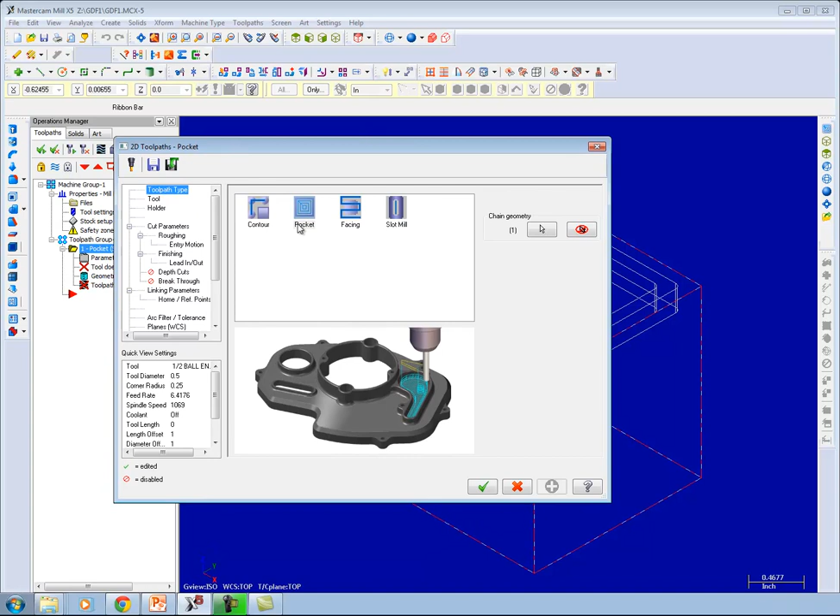So I click other face, and you can see that now the blue sort of goes around the top of the pocket, and that's what we want to have, because we want to tell our end mill to circle around there and mill down, straight down. Okay, I'll select that, and I'll select that, and this brings up the 2D toolpaths, in particular the pocket window. So we're already on pocket.

Let's talk about what we have to do now. We've kind of told the end mill where it needs to go and how we'd like for it to move roughly right around that loop, that chain. And now we need to tell Mastercam what machine parameters we have, so to speak. In particular, a tool, right? This is an end mill, so nothing's selected. We're going to select in the library,

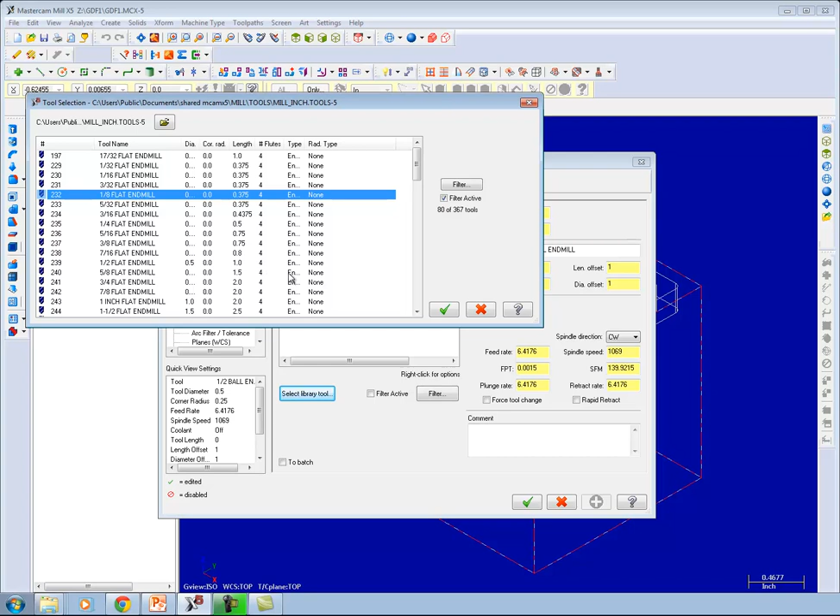and I'm going to just select tool number 232, which is a 1/8 inch flat end mill. 1/4 inch might be more appropriate for the size of that pocket, but I'm going to choose the 1/8 flat end mill. Okay, so I select it, there it is. We can ignore holder for now.

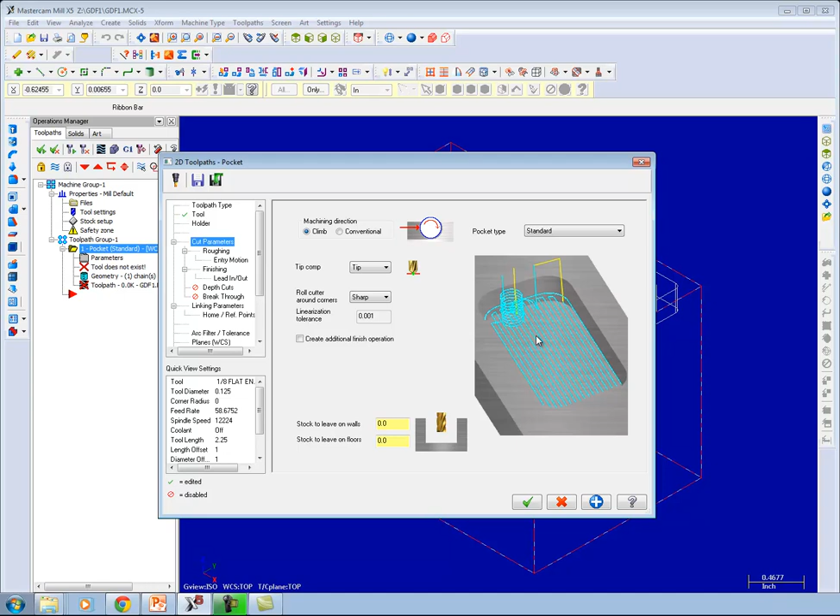Cut parameters, this is where really most of the action is. And so if we look through here very briefly, we're going to do what's called a climb cut, which we'll touch on in the future. It's got a little cartoon of how it's going to mill out that pocket, which makes sense. It comes down gently in a helix rather than just blasting right through it without any sort of gentle motion, and then it's going to do an up and down. And remember, we could have... there it is, sorry. So yeah, it's going to do that.

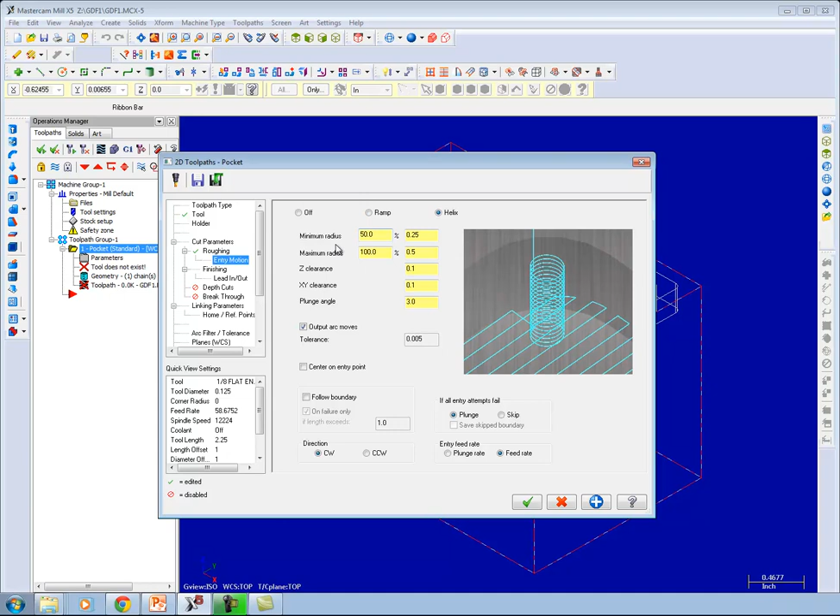Okay, roughing, that's the one that tells us what we're going to do, and we're going to stay with zigzag. Entry motion is a helix. We'll keep that as the default. Finishing, this is if we're trying to get a fine finish on the end of it, and so we're just gonna go with that.

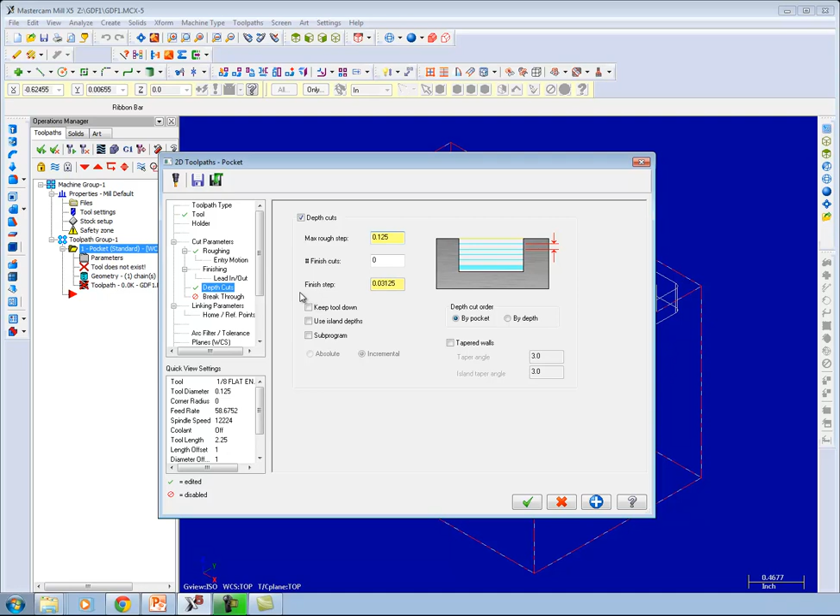Depth cuts. If I have a deep cut relative to the diameter of the end mill, I'm going to do some depth cuts. I'm going to tell it to go a maximum of 0.125, an eighth of an inch down. So it's not going to try to gouge that thing out completely in one pass. Breakthrough, we don't want to go through the bottom,

so we won't touch that. Linking parameters, as I mentioned once before, really could be renamed Z parameters. And the thing we want to do here is kind of just look at this cartoon and study it a little bit. It's got a retract elevation, a feed plane. We can talk about that at some point as well. It's got a top of stock, which is 0. Obviously, that's always the case.

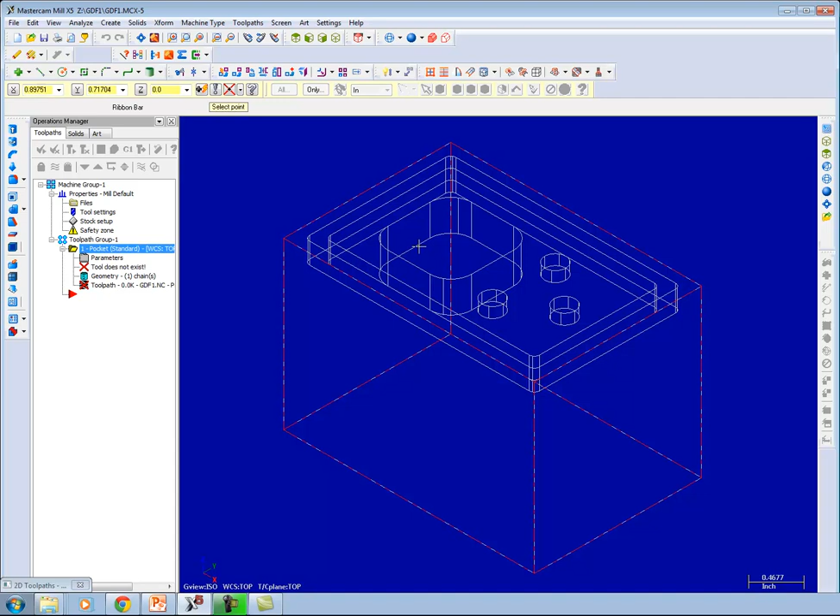And I'm going to select absolute coordinates for depth. And to get the depth, I'm going to click depth. I'm going to come over to my wireframe geometry and click the bottom. You can see that it's minus 0.375, so it's 3/8 of an inch deep. Okay? So now we've told the end mill how deep to go.

Now for home and reference points, I'm going to try to modify our default to already have this in there, but I'm just going to put in some parameters that are relevant for our mill. And that's home position of about -5, 10, and 4 for the X, Y, and Z. I want to have a specific approach and retract direction so that you guys can see sort of the orientation of our mill with respect to the part. I think this is kind of useful.

And we're going to come in from the left, so to speak. So if you'll remember, a negative X comes in from the left, and we're going to come in from about 2 inches high. And then when we retract away, we're going to move into the back, about 5 and up to 2. So we're going to come in from the side, and we're going to leave out the back, so to speak.

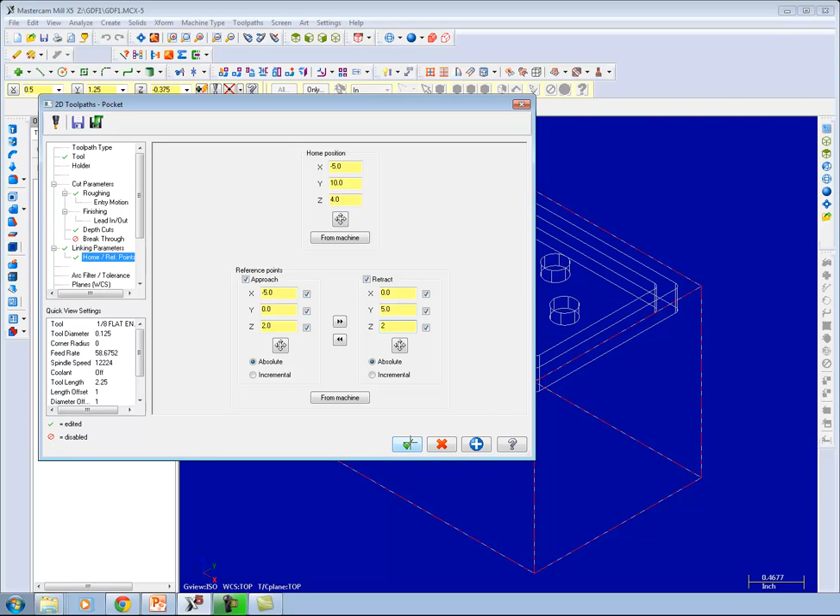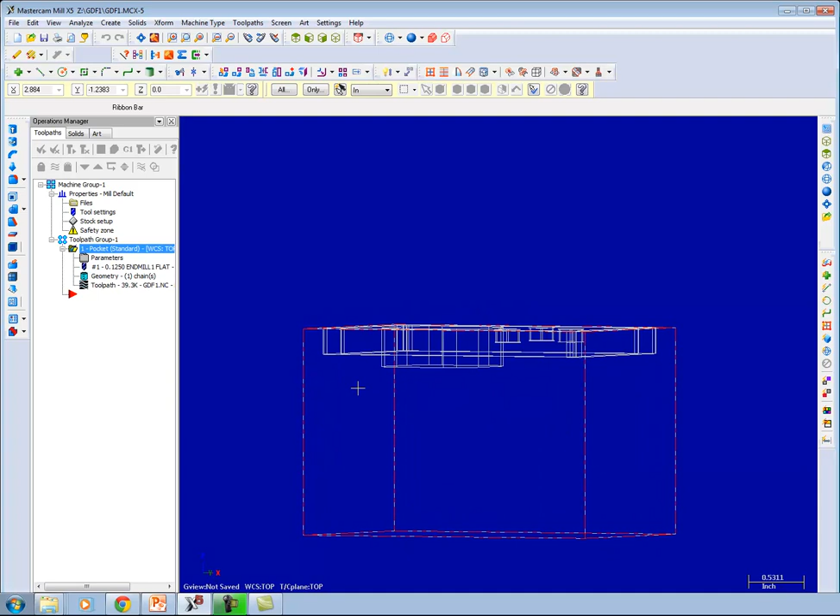Okay. So I click that, and you can see that I have a nice toolpath. If I back off, you can see it coming in, doing its business, and going out in a mutually perpendicular direction. And really kind of neat. You can see all the toolpaths it's got. Remember, it's going to do 3 of these because I'm doing depth cuts at 1/8 of an inch, and I need to go 3/8 inch deep. And of course, this is my helix entering the mill.

Okay, next screencast, we're going to continue with how to verify that this actually works, which is a standard procedure in Mastercam.